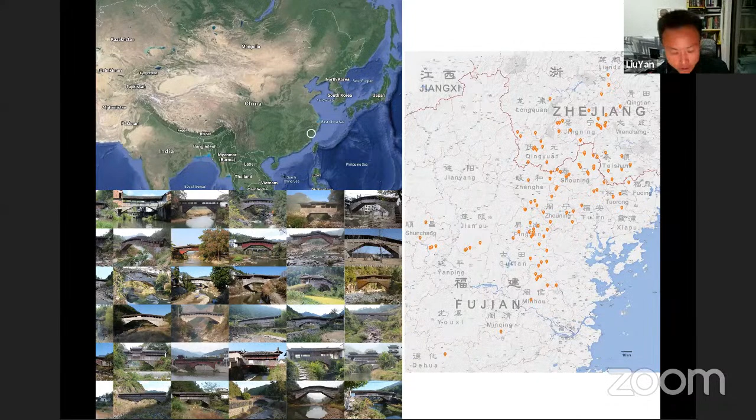In Southeast China, more specifically in the mountains between Zhejiang and Fujian provinces, a group of circa 100 historical woven arch bridges have been preserved until today. They are featured by the woven arch and the deck structure. The craftsmanship of building such bridges in Southeast China has been enlisted as UNESCO intangible cultural heritage.

This kind of structure is classified today under a larger structure type, the so-called reciprocal frame structure in the modern sense. It is a somewhat popular structure type in modern design. Many architects and architectural institutes have engaged in developing design methods for this type of structure. An early pioneer was the Japanese architect Kazuhiro Ishii in the 1990s. Based on the design work of Ishii, Professor Olga Popovic Larsen established the term in the academic field with her book, Reciprocal Frame Architecture.

Professor Vito Bertin from the Chinese University of Hong Kong discussed composition principles of this structure type and made it known to many architectural schools in mainland China via experimental workshops. Another important research group is Professor Annette Spiro's team from ETH Zurich. They developed a digital design system for this rather complicated structure, published in Dr. Udo Thönnissen's book, Reciprocal Frameworks: Tradition and Innovation.

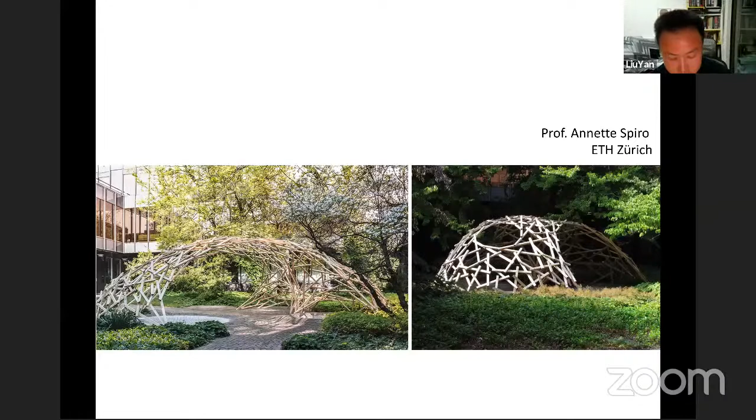Even the Pritzker Prize winner Wang Shu has been famous for his construction experiments with the woven arch and reciprocal frame structure. And today, many architectural schools have taken this structural form into their training system, including Nanjing University, where I took part in the teaching. So if anybody wishes to get some inspiration on design from the historical structure, the above-mentioned books and scholars are good references.

But modern utilization was never my aim. As a historian, what we care about is the operating principle of the historical society and the historical context, which is, in most cases, fundamentally different from our time. In other words, we look back to the past, not towards the future. So when I was invited by Professor Yuan to this symposium, I was very grateful for this trust and encouragement, but I really have great angst to join such a topic facing the future.

So finally, I decided my topic of the talk. Why do we study woven arch bridges? It's actually the question to myself. Why do I study the woven arch bridge, from the viewpoint of an architectural historian? So I'd like to share some of my personal understanding and answers to this question from at least one aspect, from a higher level. So how did I engage myself in the study of the woven arch bridge?

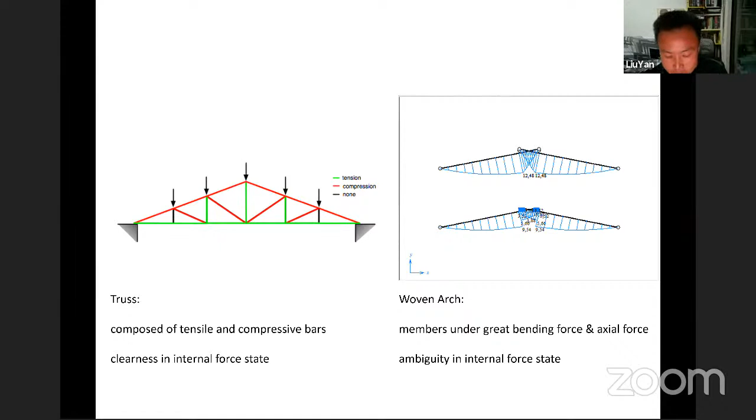Related to the interior force, the structural feature of the woven arch is rather complicated to a mind trained with modern sense. Clearness in force state is one of the design rules in modern engineering. A truss is the best representative of this. The two-force members in the truss not only explore the best loading capability, but more importantly, the clearness in structural logic enables comprehensive structural analysis. In this way, the truss is almost a symbol of structural mechanics. And the truss theory developed in the 19th century was one of the foundation stones of structural science since early modern times, and embodied some of the greatest building achievements of the time in human history.

The woven arch structure, on the contrary, is a representative of structural ambiguity. Firstly, its reciprocal feature means that all the members are tangled with each other. A little change in one member will result in an interchange in the entire system and onto itself accordingly. This makes great difficulty in analysis and calculation. And the structural form is a combination of many features contrary to our common knowledge of common structural forms. For example, it works as an arch, but bears great bending force inside. Normally there shouldn't be bending force inside an arch.

And the arch needs thrust from abutments to keep it stable. But a woven arch does not rely on it. And in extreme examples like the chopstick game, the thrust will cause collapse of the woven arch. Its structural stability actually relies on the load upon it. The greater the load, the more stable the structure, until it reaches the load-bearing limit of the structure. Relatedly, the reciprocal mechanism means that every member is related to the entire system, and the failure of one member will result in the collapse of the entire system. This is the exact opposite of the structural design principle in which safety plays a crucial role.

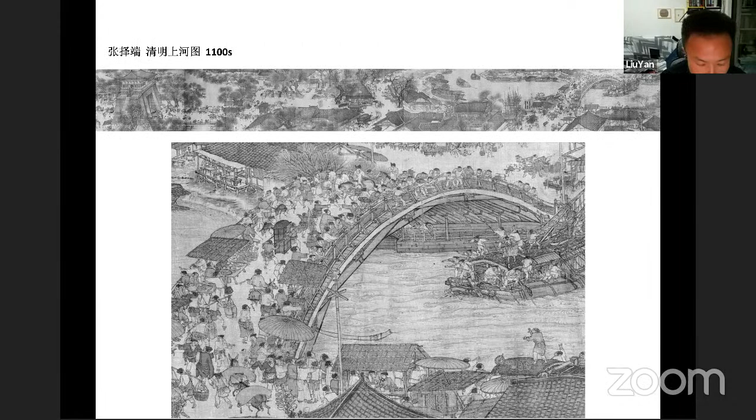In Renaissance Italy, in Da Vinci's design. In Qingming Shanghe Tu, in the northern China plain in the Song dynasty, 12th century. In the 19th century in Japan, in the US, in Norway, in Germany, in Southwest China, Northwest China, and Southeast China. So most of these examples appeared singularly in their own region and culture, believed by the locals to be unique or even one of its type in history.

But when we dig out all these examples from all over the world, the isolation of these respective cases reveals meaningful information. There were speculations from both the East and the West, since the structural form is rather unusual, that the historical cases of woven arch bridges, especially the most famous Da Vinci design and the Chinese examples, were related by cultural influence and/or technique spread.

However, according to my in-depth case studies, there are no direct connections between these cases. Just the opposite, several of them, especially the Da Vinci design and the Chinese cases, have almost solid evidence proving their own local technical origins. Let's explain it very briefly. So, Da Vinci's design.

Da Vinci's story starts from his own cultural root, from Julius Caesar in Roman times. Julius Caesar described a rather peculiar bridge design in his own book, the Gallic War, with detailed technical descriptions. He mentioned a bridge with which he was able to lead his army across the Rhine. And in his technical description, he mentioned some special constructions which inspired many Renaissance Italian architects to study and reconstruct, including Alberti, Palladio and Da Vinci.

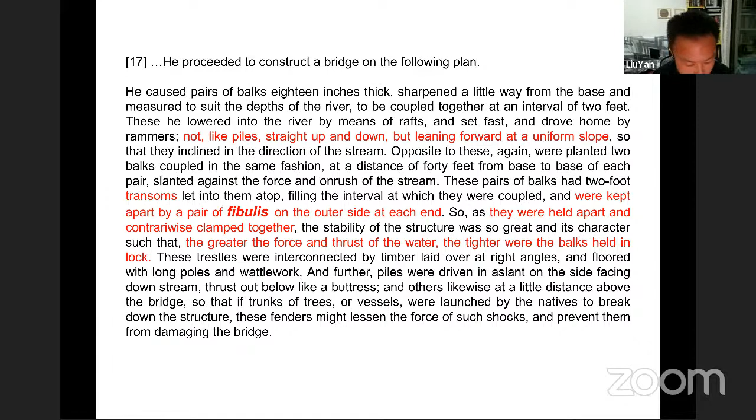It was at a time when Italy was going through endless wars with its neighbors, and both Palladio and Da Vinci aimed to study the military technique of their Roman ancestors to help their soldiers on the battlefield. Both of them got the same inspiration from Caesar on a special wooden joint interlocking each other to enhance the stability of the joint.

Da Vinci developed this idea into the woven arch bridge, and he named it articulately: to weave a bridge. From this idea to weave an arch, he went further to the idea to weave a vault, thus inspiring the modern reciprocal frame structure we mentioned at the very beginning. Weave or textile is Da Vinci's archetype of design, and Caesar's bridge construction is his inspiration.

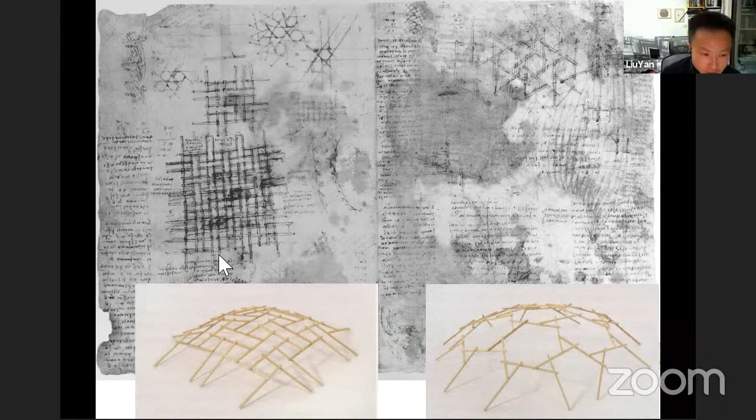Other examples follow some other roads. The Norwegian examples take the local three-sided arch as an archetype, developing the woven arch by enhancing the joint of the three-sided arch. In some other cases, including the Japanese examples and the two types of bridges in Southwest China and Northwest China, the cantilever bridge plays the role of archetype for the development of the woven arch structure.

But for the famous Qingming Shanghe Tu, it's another story. Here, outside the capital city Bianliang at the time, the so-called Rainbow Bridge was built to solve the traffic problem over the Grand Canal. The officers and craftsmen faced the problem of building such a flying bridge without blocking the canal and the ship traffic. The challenge was more about the construction rather than the structural form.

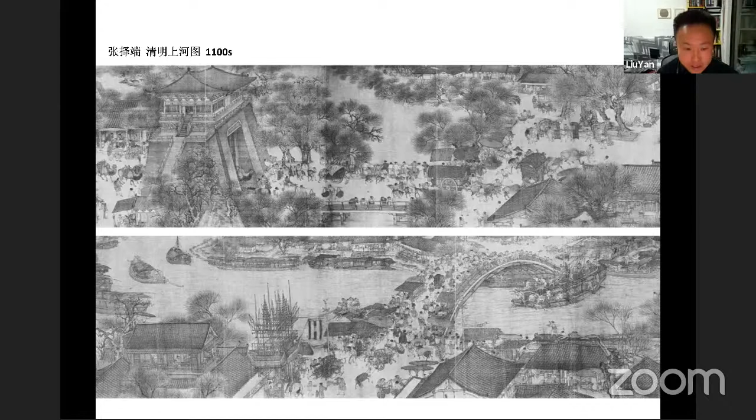Their structure is so similar to the chopstick games that we have reason to believe the game itself might have played the role of the archetype of the design directly. There are some other cases that might be inspired by a similar playful game, including the Japanese examples of different times and places, and the German example.

However, the most splendid examples are the group in the mountains of Southeast China. If all the others are either small-scale items or short-lived experiments, the woven arch bridges in Southeast China are real construction projects to meet the basic living requirements of the local society, to fly over cliffs and deep water, forming a craftsman tradition for over 4 centuries.

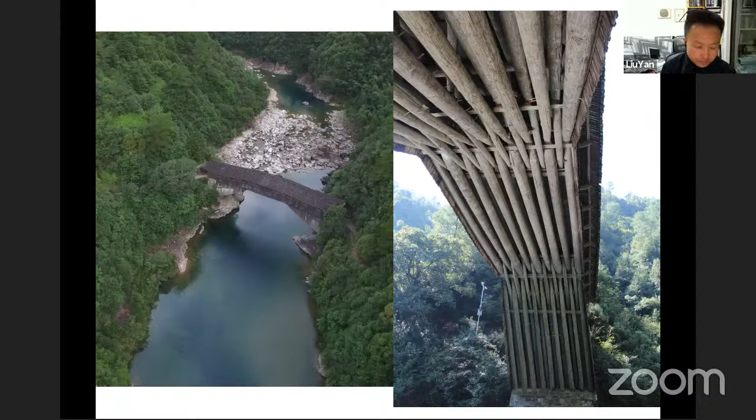At the least developed mountain area, carpenters have figured out a set of design methods using rather primitive tools, drawings, and calculation methods, building grand constructions over the most dangerous sites with the simplest scaffolding system. They had to develop an entire system of technique, from the selection of joints to the cooperation of carpenters with somewhat acrobatic practices.

Despite the strong similarity, they do not have necessary relations between them. The idea of woven arch mechanics, namely to weave an arch-shaped structure with straight timber members to achieve a certain span, could originate independently at any time, any place, as a coincidence in similarity of form, with no necessity of being influenced by each other.

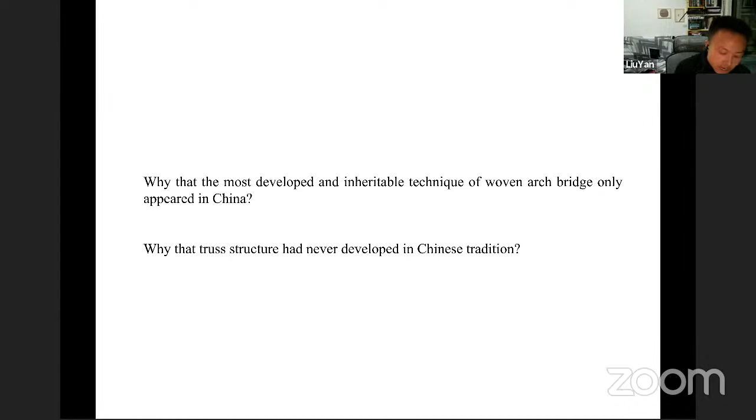It is understandable in European cultures, where truss has a long root in their building history, combined with the fact that truss is a much more effective structural form in span capability and construction convenience. There was no urgent need for people to explore the possibility of woven arch structures, even when they had come up with the structural idea. On the contrary, in China, where truss was never a structural option at hand, facing the challenge of span, when the idea of woven arch came into being, it was more likely to take root in the building culture.

Therefore, my question of woven arch versus truss could be understood as a sub-question of the famous Needham question. He asked, why did modern science take its meteoric rise in the West at the time of Galileo, and why had it not developed in Chinese civilization? So seen from this aspect, the comparison between the woven arch and the truss is actually a comparison between Eastern and Western building cultures.

We mentioned above, rather briefly, that the woven arch, in some aspects including mechanical features and structural logic, is exactly opposite to the truss structure. Their differences exist in mechanics and construction, but also as a representative of their cultures.

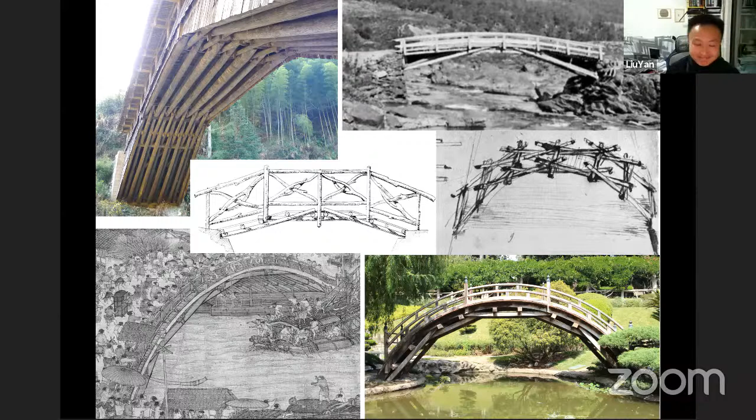Fantastic lecture. I think it gave us a profound address of this kind of timber structure. Cross timber structure goes into not only the history, but also different regions around the world. I think we can make further discussion afterwards. Let me think about the questions.

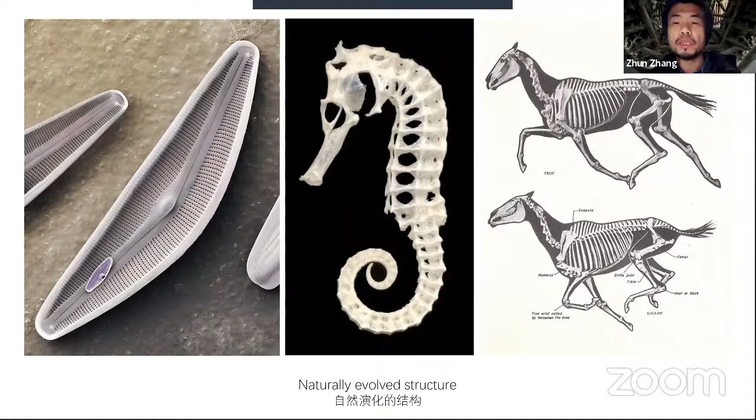So in this view, anything is structured, or structure can be a way of looking at this world. I think this attitude can affect our structure design.

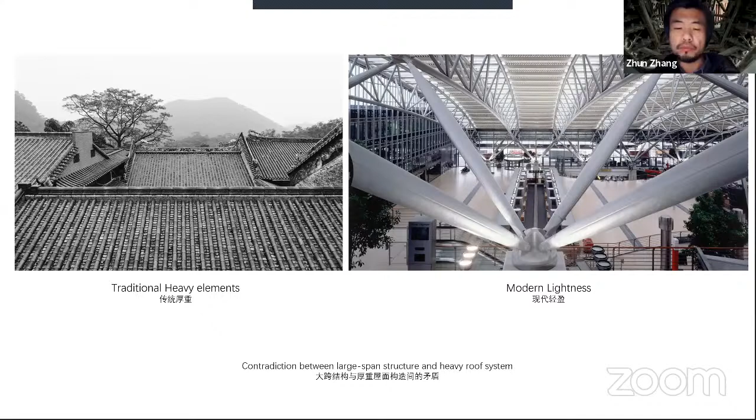So we considered the suspension roof. Three projects had certain reference value for us. The Portugal National Pavilion in Expo 1998 has a real concrete roof - it's very thin, but heavy enough to resist the wind. And Expo Hall 8/9 is a multi-span suspension roof, with roof spans of equal length.

And the Yoyogi National Stadium has an irregular overhanging steel roof. It's heavy enough too, and reaches suspension by flexible cables. What we needed to do is develop their ideas, and the most important thing was to use the real tile as the wind-resisting counterweight.

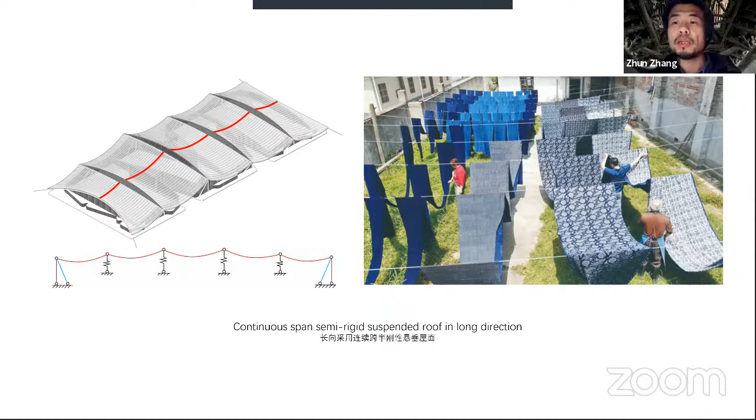Our project has 5 different spans in the long direction, and the heights of the ridges are also different. This roof is like clothes hanging on the ropes. We fix both ends by oblique columns and ground anchor cables. The middle supports are elastic, so this is a semi-rigid suspension roof. In this picture, it shows the oblique columns and anchors - the columns are hidden in the curtain wall, and you can see the heights of the ridges are different.

At the ridge, we use a beam string to support the suspension roof on both sides. It is necessary to carefully adjust the span and the sag of the suspension beams. This can avoid torsion on the beam string caused by unbalanced force, which comes from the suspension beams. On the other hand, reducing the span of the beam strings is also an effective measure to optimize.

Now the main structure system is finished. The right part is the beam string and the A-shape support of them. In the A-shape is the equipment space, and the blue one is the continuous suspension beam. The suspension beam is highly efficient and economical, so the 200 millimeter H-shaped section can span 48 meters.

In the process of improving this system, we found that the mechanical performance of the arc beam is very close to that of the catenary beam. So we try to unify all suspension beams into the same curvature arc. This can speed up the construction.

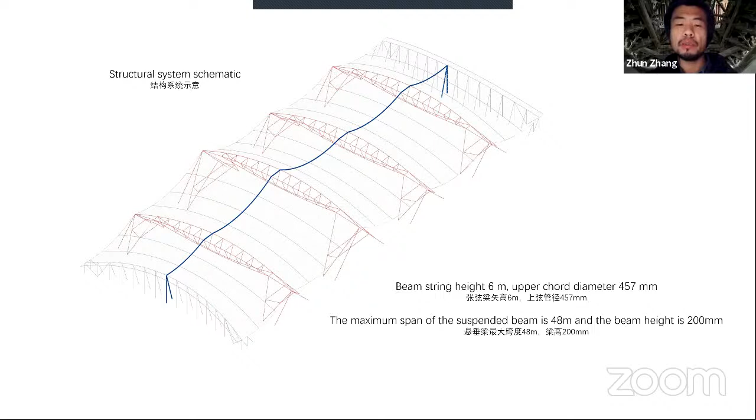After comparison, we found that although the original system has a large span, it has similar material cost, is easier to build, and has better space quality. And at that time, the foundation was preparing to build, so we kept the original system, but we didn't want to passively respond to the space change.

Although the tile's weight is enough to resist the wind, we added anti-wind cable at the location of space division. This cable is also the skeleton of the inner curtain wall.

We started this design in March 2018, and you can see the A-shaped supports had been installed by May, and all suspension beams followed.

It started to install beam string and oblique columns. In the left picture is the resist cable of the A-shaped supports.

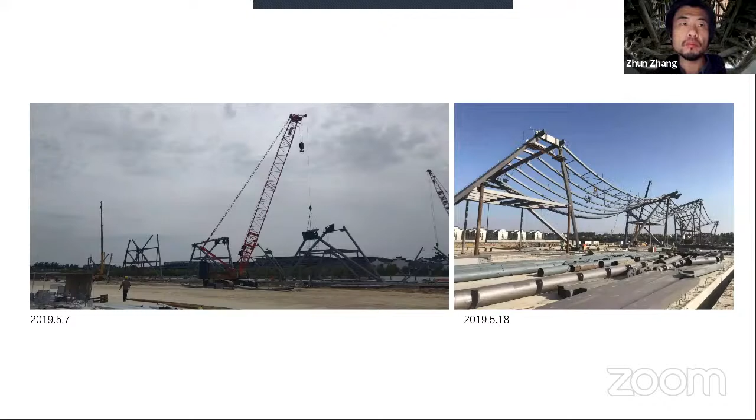Suspension beam almost finished in June. On the left, the worker installed the link members, and on the right, they are laying roof panel and insulation.

The distance between suspension beams is 2 meters. It's just the economy span of the roof panel, so the purlins are no longer required.

On the left, the beam string is finished and the suspension beam lays on them just like a silk scarf. On the right, the curtain wall started to install in July.

For fast building, the tiles were pre-installed in the factory, as shown on the left, and on the right is the internal curtain wall. You can see the aluminum panel fixed on the wind resist cable.

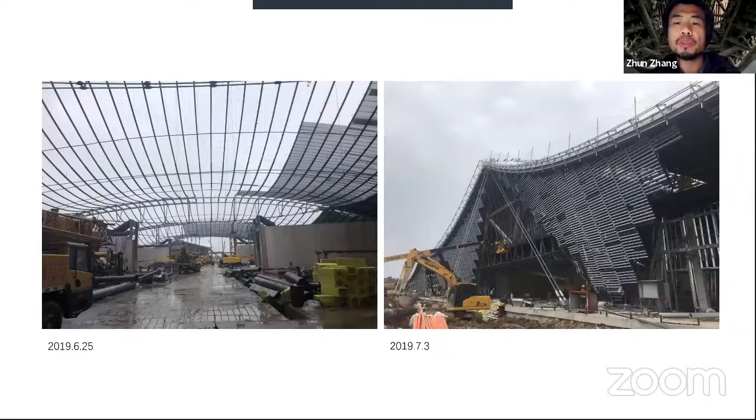In this project, the beam string is an important structure to show, and it's also a skylight. You can see the suspension beams and the wind resist cable directly, but they seem like decoration. In fact, they are also main structure. The A-shaped supports indirectly show this to us.

Through the reasonable design of the structure, the tiles changed from negative to positive for a large span roof, and the detail of the design evolved with external conditions.

The next project to share is a timber roof. It's located in Shanghai. There are 2 roofs covering the triangle courtyard. Because they use the same structure system, I'll talk about the bigger one. It's about 40 by 60 meters, and it's independent of the houses on both sides.

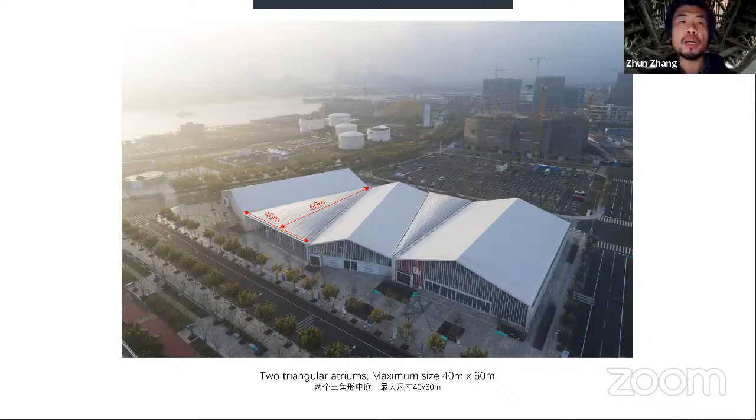The roof is an irregular shallow shell supported on 20 columns. Like the project shared before, this one also needed to be built fast, about 4 to 5 months given to us. The good news to me is the roof can be covered by a polycarbonate panel that is lightweight, and the courtyard doesn't need to close, so the horizontal wind load is small.

For shell structure, form finding is necessary if we treat the columns as the support condition. The shell form will be like the left. The other option is form finding with the triangle edges as the support, like the right. Although the thrust of the left shell is smaller, the curvature of the right is relatively constant and easier to build, so we chose it.

The rise of this shell is about 3 meters. Compared to a normal shell, it's shallow. The shallow shell needs to resist axial pressure and bending moment, especially for this specially shaped timber shell. After its creep, the additional bending moment will become obvious.

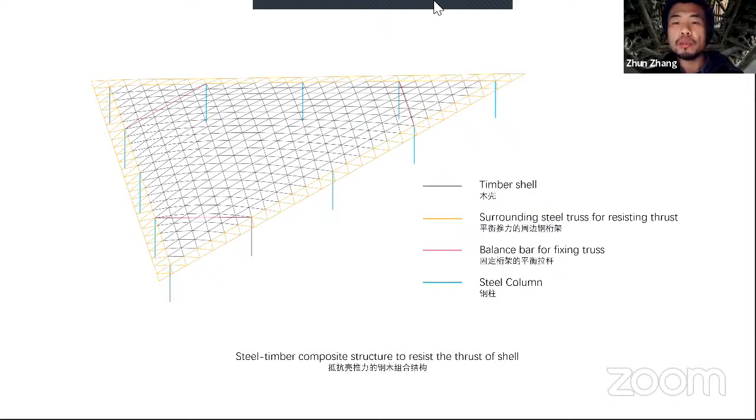It's an ambiguous expression of this structure. The force flow is not directly shown off. That's what we want. In this picture, you can see all steel parts, the columns and the edge truss.

Next is how to detail the timber shell. As we know, the force flows through the shortest path. The arrangement on the left makes it easier to transfer to the columns. But you can see from the entrance perspective, there are too many components. Considering the effect, we chose the scheme on the right.

In this system, the force path becomes longer. So we wanted to use full-length timber members, which can have better stiffness. But the time and the cost of curved timbers can't be accepted. We need another way out. So how to build a large span roof with short straight members? We referenced the lamella roof.

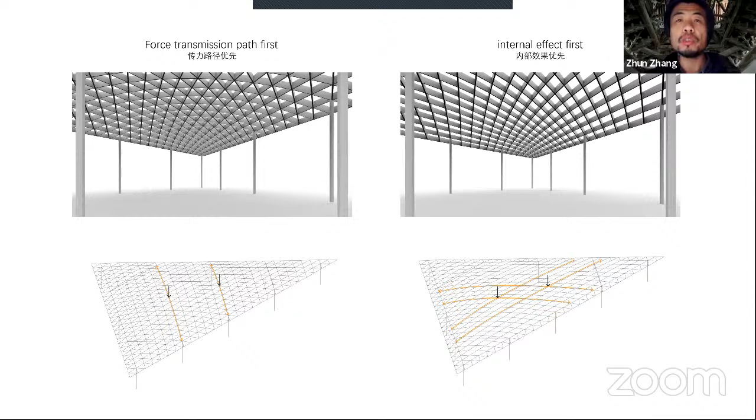But in our project, it's a shallow shell. The joint needs better stiffness. So we must improve this original design. The goal of the improvement is to control the amount of timber, allow better adjustment for installation on site, and increase the bending stiffness of the joint.

At the joint position, the timber members in one direction run through. In the other direction, the bending moment is transmitted by two steel screws and connectors. Two 50mm timbers grip the steel connector and are connected by self-tapping nails. After adjusting on site, the nails are driven in. By using this joint, the roof can be built safely and quickly, just like building blocks.

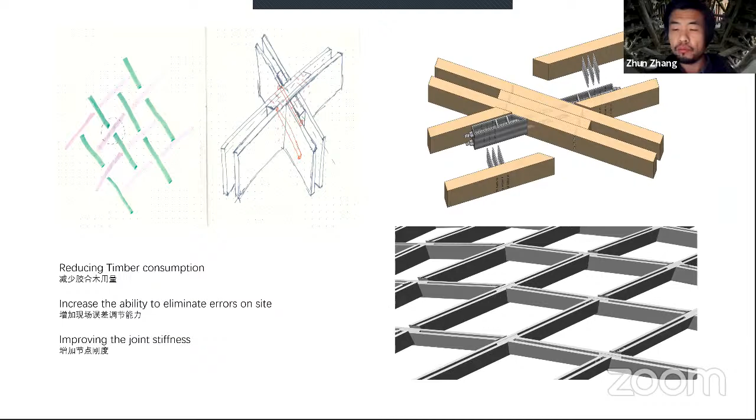The stability of the shell and the connection between the shell and the truss are critical. So in the final design, the related components were reinforced. In this way, the structure was completed on time, and the effect is good.

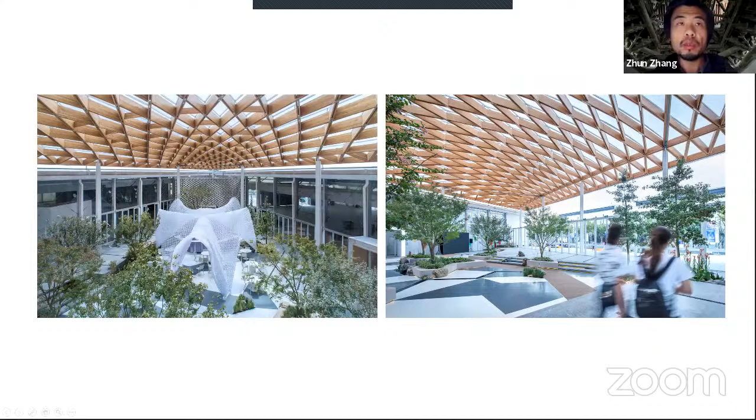In these two projects, structure design not only pays attention to stress, construction, and cost, but also many indirect design clues. This connection of clues reminded me of a Chinese classic: harmony with differences. This sentence comes from Confucius. I think our design faced the same thing. A design concept is important at the beginning, but there are so many changes for different reasons we need to face. Of course, keeping the original concept is important, but the change itself makes the design concept different.

If we look at the world in a structured way, everything can be the clues of the structure. I think that's very important to structure design.

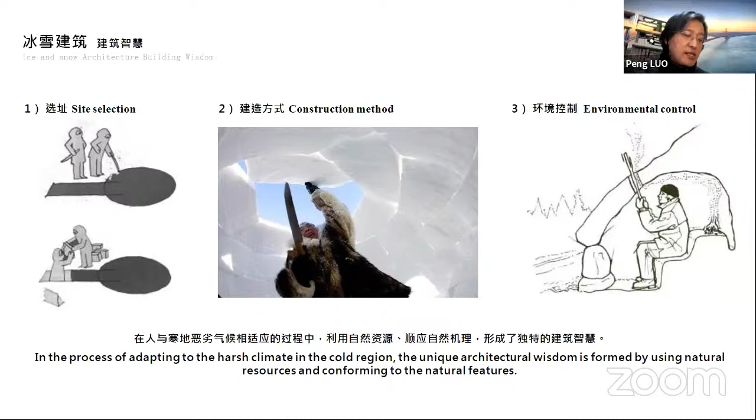Under the action of the spatial environment, a unique natural landscape has been formed. The material, shape, color, and texture, by adapting to the natural environment, form the unique beauty of the cold region. In the process of construction in the cold region, human beings have formed unique architectural wisdom. Ice and snow architecture is a typical example.

For example, the igloo. The Inuit who live in the Arctic were the first to use ice and snow materials to build temporary houses. This kind of snow dome is named igloo. In winter, the inner room is up to 0 degrees.

This is Kamakura in Japan. Kamakura was also built by digging the snow out of a natural snow pile to form usable space. It's usually small in size and used for food storage and wine making. Later, it became a space for traditional Japanese festivals.

The world's first ice hotel was built in Sweden in 1990. After that, similar ice and snow hotels, churches, bars, and other ice and snow buildings have been built in Canada, Finland, Norway, Switzerland, and other places.

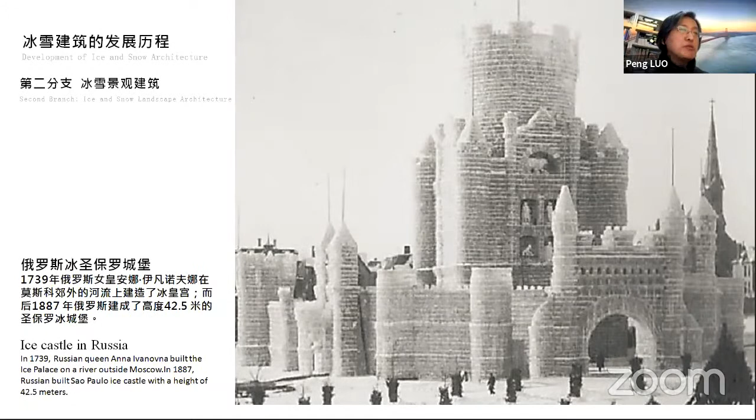Another branch of ice and snow architecture is ice and snow landscape buildings. In Harbin, my hometown, Harbin Ice and Snow World has been built every winter since 1999. At present, it has become the largest outdoor ice and snow park in the world. The highest building reaches 60 meters.

Since 2016, the international innovative design and construction activities of ice and snow architecture have been held in Harbin every winter. We work with many well-known institutions. They include IASS Group 21, Union of Arctic Universities, TUE, Cambridge University, Ghent University, Leuven University, Kent State University from the US, University of Lapland, Tsinghua University, and so on.

Through the cooperation of architecture and structure, we explore the innovation of ice and snow architecture, structure, and construction technology. These projects were made not only by our team, but also by teams from the universities.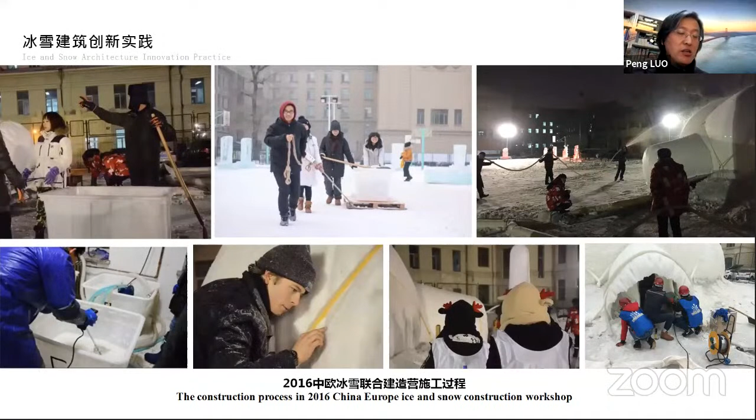The workshop is part of the Ice and Snow Festival of HIT. For the students, the activity is not only a process of practice and learning, but also a happy festival. This is a picture of removing the mold from the ice shell. This is the picture when the project is finished.

Combined with the project, we tested the structural performance, thickness change, deformation, sublimation, internal environment of the ice shell, and the influence of solar radiation. These are the results of the test. And the material test was made by the team of Professor Wu Yue of the School of Civil Engineering of HIT.

Based on the above construction practice and tests, from December 2017 to January 2018, the design and construction of a cloud tower was finished by teachers and students from HIT and TUE in Harbin. The height of the ice shell is 30.541 meters, creating a new world record for the height of an ice shell. For the project, we cooperated with Professor Arno Pronk from TUE and Professor Wu Yue from HIT.

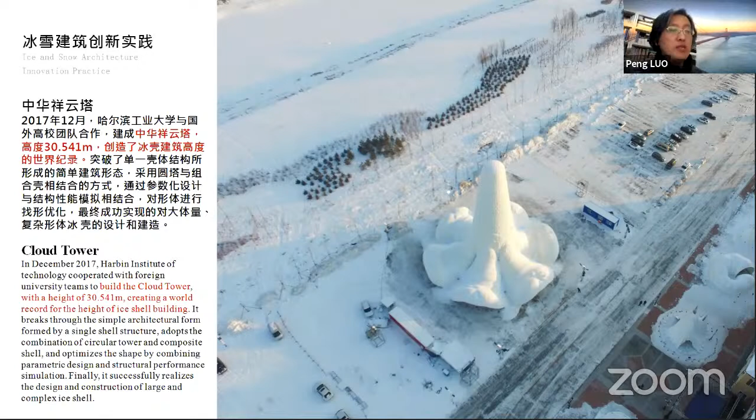This is the construction process of the tower. This is the effect of the external, internal, and night view of the tower.

This is the effect of the ice shell material and the texture. Just like the tower is made by cloud, the texture is not only made by human beings, but also by nature. This is the internal structure and the construction texture of the ice shell.

In December 2018, we designed and built the ice shell bar and hotel in Harbin Ice and Snow World. The total building area is more than 600 square meters. The largest span is 22 meters. The project is the first ice shell building put into practical use in China.

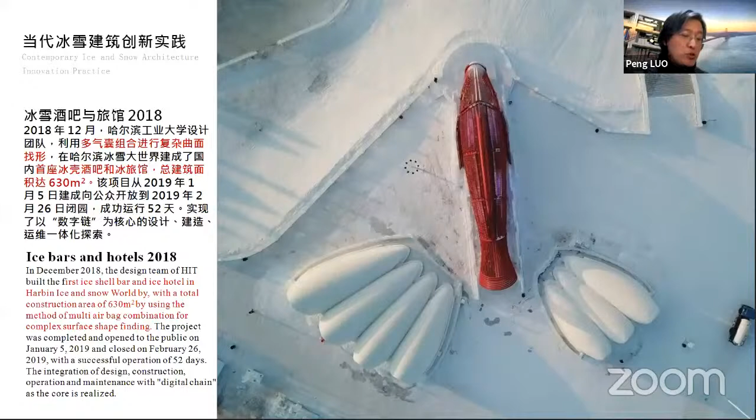During the design, construction, and maintenance of the project, the digital model and computer tools play the role of connecting each stage and realizing the collaborative design of architecture and structure. Because of the time, I only show some pictures of the project. Yeah, this is a picture when the shell was after mold removal and cutting. This is the picture after it finished. The picture from the lake and the indoor effect.

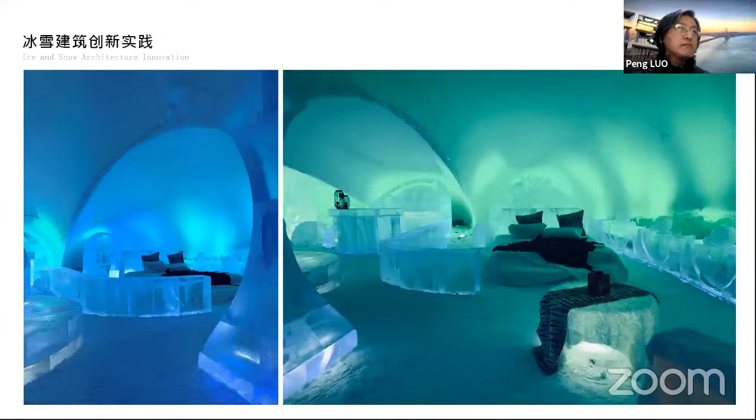In 2019, we used the air bags as the mold to find the form of the ice shell. So form finding and the construction of ice shell by air bags is helpful for mold control and cross construction for different types of work in the process of construction, and is also helpful for the innovation of architectural form. With the project, the combination of design, construction, operation, and maintenance of ice shell based on multi-objective optimization was realized.

The site is the same as last year. There are an ice bar and an ice restaurant on the site. The total building area is about 930 square meters. The building area of the restaurant is about 660 square meters. It's a hot pot restaurant.

The project is based on the material environment and the unique requirements of the architectural art. Comprehensive consideration of the needs of the construction and the user by analyzing the influence factors of design. Four key design elements are summarized. They are structure, function, construction, and art.

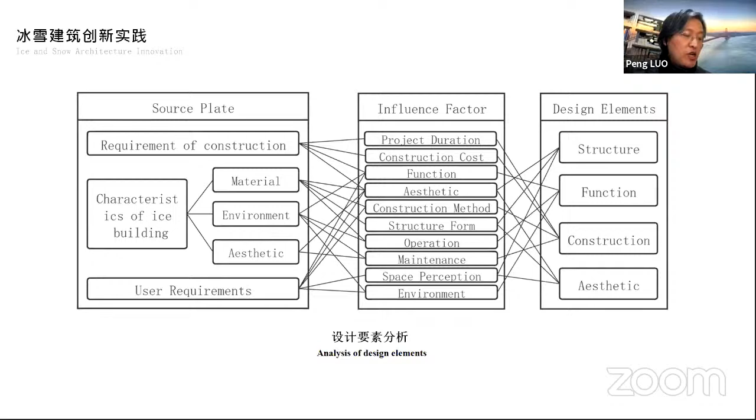The work starts from the design elements based on the digital design logic, especially a spatial digital integrated design system, and then integrates the digital design tools, building the technical route. Based on the site, structure, function, and art, the scheme of the building is formed and the digital model determined. The model is used for the performance simulation and optimization.

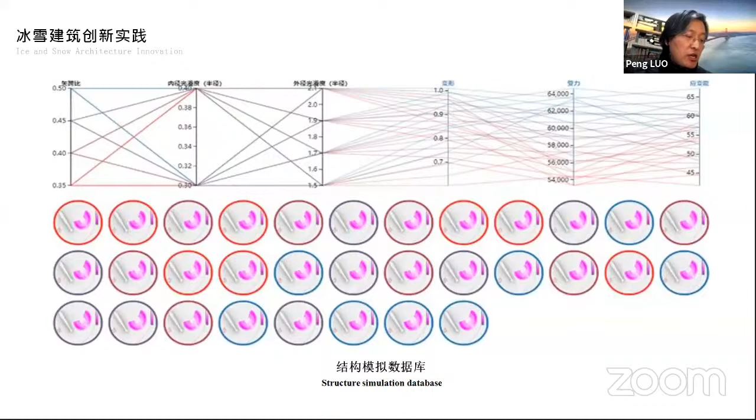Grasshopper based on Rhino is used to build the digital information model. In terms of structure, Karamba 3D is used for structural performance analysis, scheme comparison and optimization. Considering the influence of solar radiation on the ice structure is significant, Ladybug is used for solar radiation analysis to determine building form and orientation.

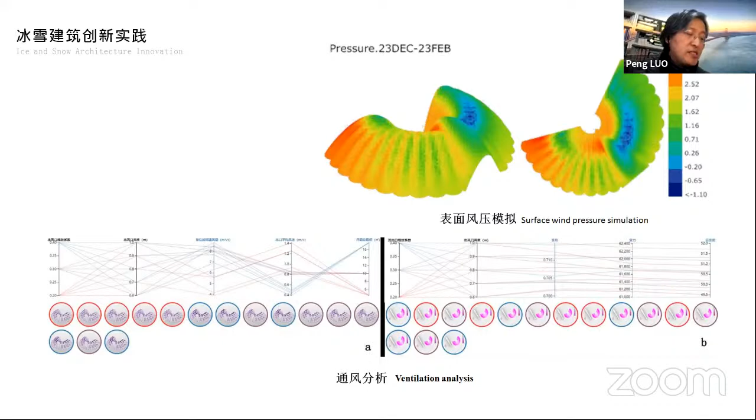In function, the Rhino visual interface is used to control the plan layout, and analysis of outdoor wind environment and indoor ventilation with Butterfly determines the location and the size of the building vents. Therefore, the digital model is used to simulate the structural deformation and the stress, and determine the structural thickness of the ice shell. Export model data, draw architectural drawings, determine the internal design.

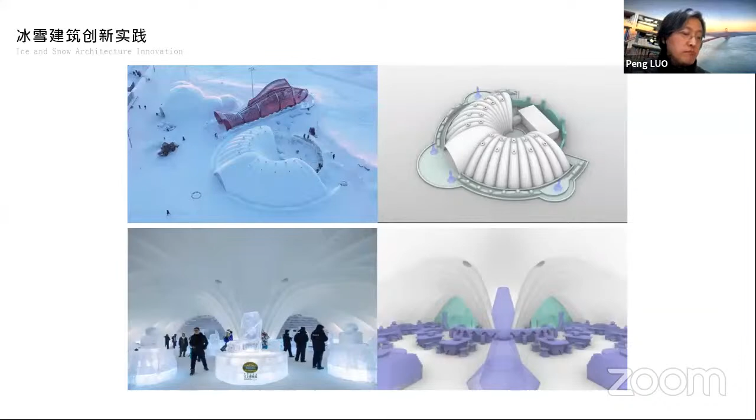The visual effect of Rhino models is used to evaluate the artistic effect of the buildings. In the aspect of construction, the digital model is used to control the processing of the inflatable membrane, set positioning, and air pressure control. And through 3D scanning, the digital model of the construction mold and the ice shell was generated, which is compared with the digital model to determine the safety of the structure.

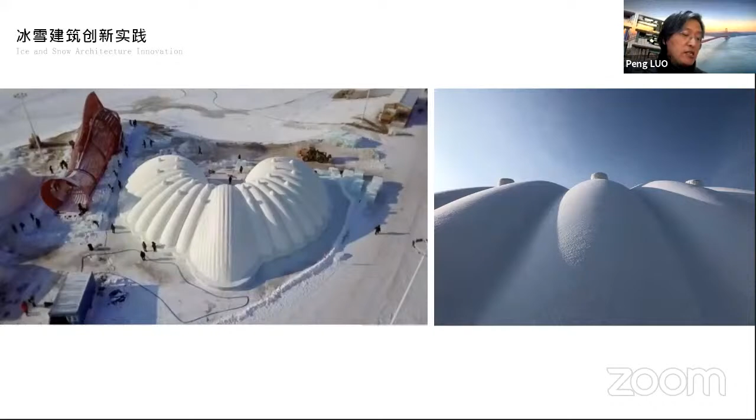The ice shell has good climate adaptability. The internal space environment is stable, which gives good protection for the internal ice structure. When it was removed on March 23, the outdoor temperature reached 10 degrees above zero. The project was reported by Discovery of the UK and CCTV of China.

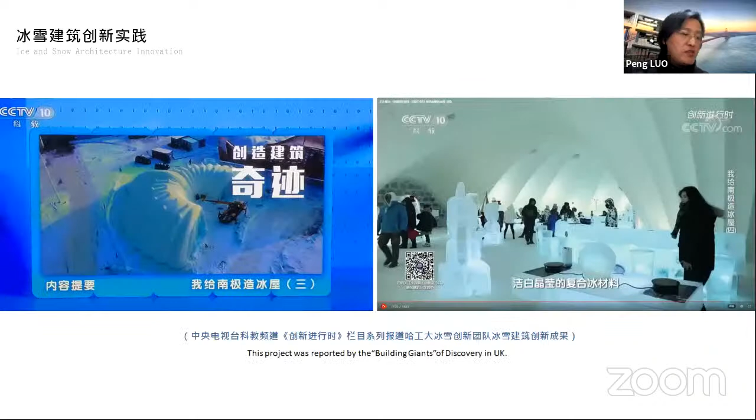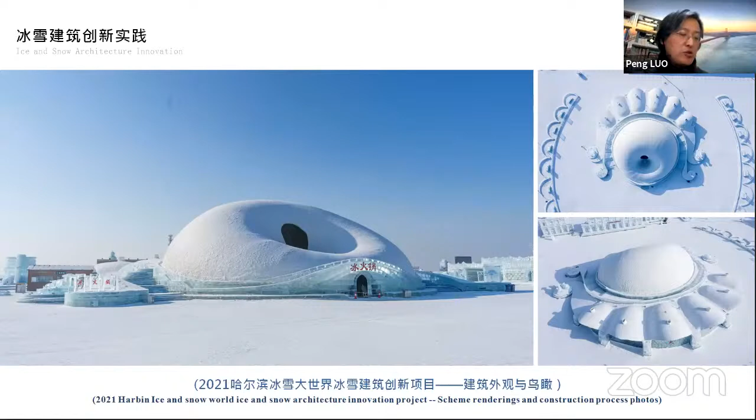The 30-meter ice shell was all located on the ice masonry structure. Six small ice shells with a span of 6 meters are supported on three sides by ice walls.

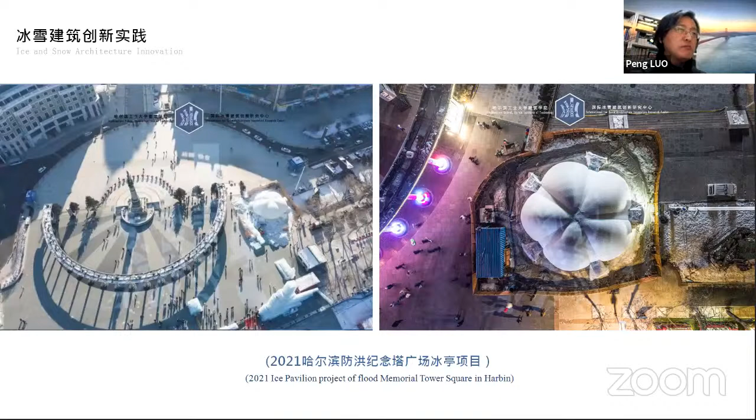In addition, this year we also designed the ice pavilion project on the square by Songhua River. Only 5 points supported the 12-meter ice shell. Through the research, design, and construction practice of ice shell architecture, we have the following opinions.

Ice and snow architecture is a part of nature and a common work of human and nature. Ice and snow architecture design should adhere to design with nature, adapt to the natural environment, apply the principle of nature, create the beauty of nature. The original beauty of structure is an expression of natural beauty in architectural projects.

Digital design methods and tools are important to support a better understanding of nature, better conforming to nature, and better cooperating with nature. Find the wisdom of the cold region, establish smart design, construction, operation, and maintenance. An integrating system based on digital twin is the future of ice and snow architecture.

Of course, there are still many questions to be answered in ice and snow architecture. We look forward to communicating and cooperating with you, and welcome to Harbin next winter. Thank you very much.

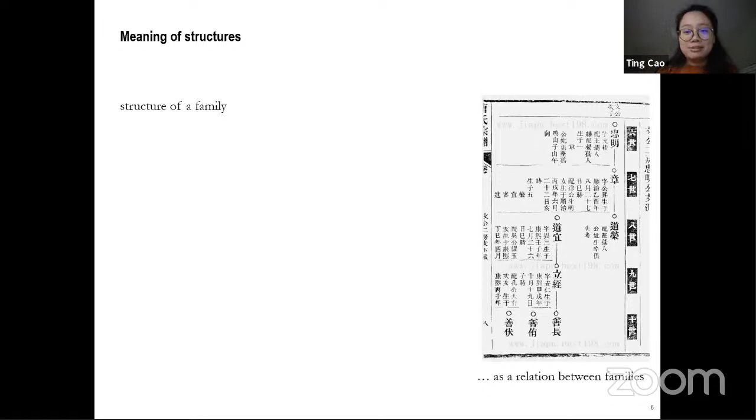And also, if we're talking about the structure of a family, actually we are talking about the relation between different family members. So generally speaking, structure is an arrangement and organization of interrelated elements in a material object or in a system. So in this sense, I would say structure actually is a certain abstract relationship between different objects.

So if we go back to our research fields, we are generally talking about load-bearing structures. For the load-bearing structure, we normally think of it as a predefined shape or typology, something already existing that you cannot change too much, like beams, columns, trusses, or arches. Something with solid experience. We never think about what could be the abstract relations behind this structure typology, how we can change these relations, and how our design could benefit from this change.

So if we don't consider the structure as a predefined shape, we should find a universal way to describe all the structures. The fundamental meaning of the structure is to transmit loads to the ground. So the transmission of the loads, of the forces in the material, will become force flows. Force flows, we also call the form diagram in graphic statics.

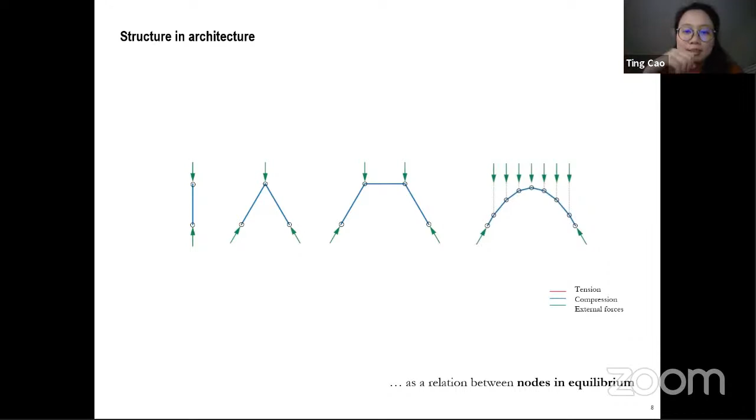By manipulating the nodes in equilibrium, like changing the number of the nodes, the position of the nodes, and the connectivity between the nodes, we could get thousands of variations. Each variation could represent a new equilibrium relationship in structure and a new load path to transmit forces to the ground. So force flow can deform and grow according to the same principle, the principle of equilibrium. Here, we discuss the first layer of meaning of force flow as the equilibrium relation in structure.

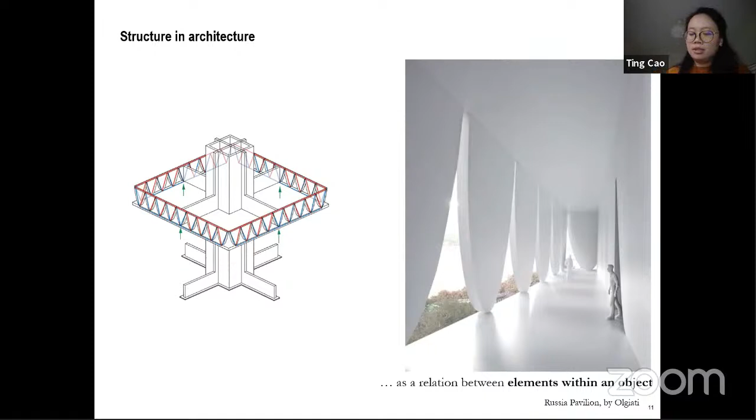So this gives a small conclusion: we shouldn't judge the structure according to appearance, but for the logic lying behind. That's how we could create something new for our design.

The relation represented by the force flow can go beyond one object. In this case, the Horizon Innovative Center designed by Kerez, the equilibrium of the force flows defines the compositional order of all the elements in this spatial system. You may see the variation of the columns differ from one to another, but all these variations come from the same simple equilibrium principle: two inclined columns balance each other through the slab. Starting from this simple equilibrium relation, we can manipulate the points and loads in equilibrium, and get more variation of the columns in space.

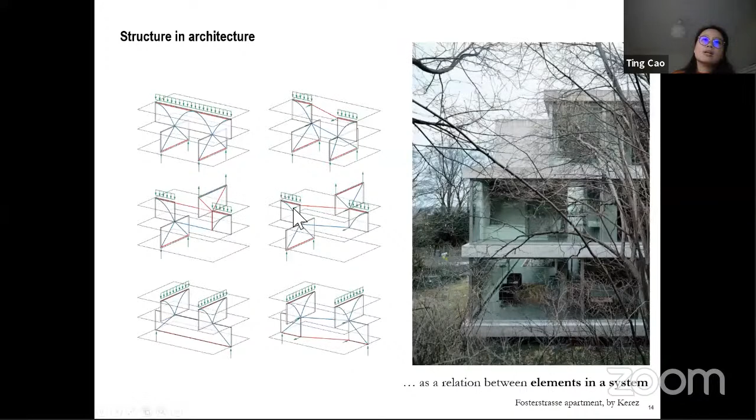Here we talk about different relations in architecture and structure. Some of them are more close to the load-bearing function of the structure, some are more close to the definition of architectural space and appearance. However, I would conclude all of them as an abstract compositional order, because all these relations are discussing elements and relations between elements, no matter if the element is an abstract one or a material object.

Here there would be one diagram that could represent all these relations: that's force flow. Force flow is an abstract and operative diagram. With this diagram, as we described before, we could generate a lot of variations.

Then here comes another question. Since we have a lot of variations, that's a good advantage for us, but how can we decide which one is the best choice for design? We have to think about it from two sides.

From the structural side, we normally judge the shape of the force flow according to the performance of the structure, which would be the most efficient load path to transmit the load to the ground, because the force flow is actually the path to transmit loads to the ground.

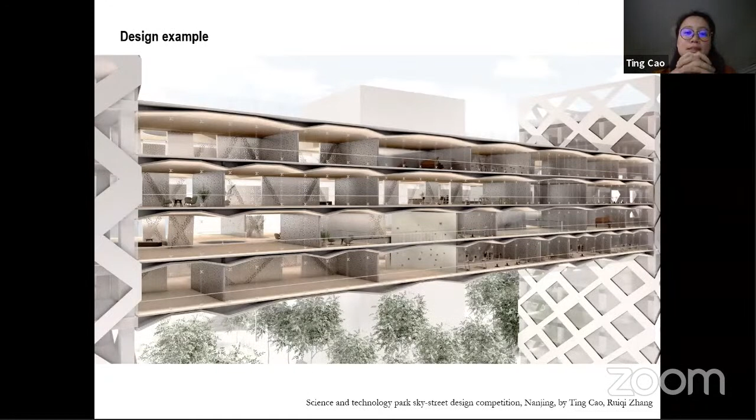In this design, the first question we need to solve is a big span, around 60 meters between these two buildings. So our design first starts from a normal truss-like force flow.

This force flow doesn't suggest the real shape of the structure, but it suggests a relation, an equilibrium relation, and also the compositional order to arrange these walls in space, because this force flow will somehow define the side walls in the center corridor. Here we add more horizontal slab.

In this sense, we could create more equilibrium nodes. By manipulating these nodes, we can get more variations on the force flow. When we change the force flow, we also change the order to place this element.

In our design, we try to create different visual and spatial experience in the corridor of each floor. That's why we started a 3D formation of the force flow, which also leads to the change of the corridor walls in different floors.

Then the next question is: how are we going to define the side walls? The side walls are cantilevered from the central structure. Here we always place the side structure symmetrically on two sides, so the two cantilever parts could balance with each other through the tension or compression in the slab.

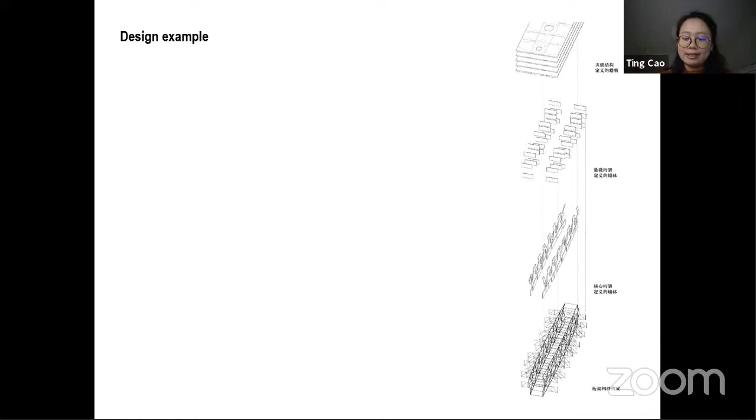This is the way how we can achieve the global equilibrium of the structure. At the end, this is the position of the walls and the slabs, and the guidelines lying behind it. When we look at the building from an architectural point of view, the walls are arranged randomly and irregularly. However, the structural logic lying behind is very simple and regular.

This difference between the structural regularity and the architectural randomness is what we want to achieve according to this project, and this is also, we think, what could make this project interesting.

So this is a test for what I described before: how to make use of force diagram as a compositional order to control the equilibrium relation and the compositional relation in architectural design.

For sure, since the force flow is a graphic, operative, and abstract diagram, made mainly from points and vectors, it's very easy to be digitalized and applied as a digital tool to help us develop design. In our group, someone is already developing tools in this way.

They mainly judge the development of this tool according to performance. But what I want to stress in our presentation is that perception, which is more related to architectural design, is also very important for this design thinking.

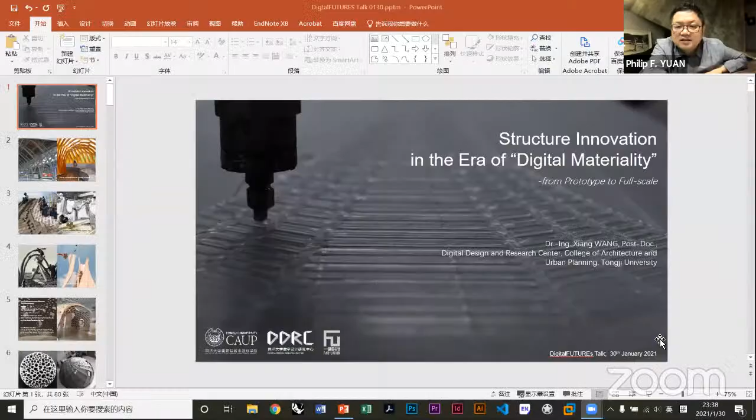So last but not least, we have another speaker today, whose name is Xiang. Xiang is a postdoctoral researcher in Tongji, and great congratulations to him. He just got an assistant professor title in Tongji University.

In the past 2 to 3 years, he actually worked with me, working in my team, and gave a lot of contribution in our research projects. Xiang got his undergraduate degree in Tongji University, and then got his PhD from University of Darmstadt. His research especially focused on structure performance-based design, and after working with me, transferred to robotic fabrication methodology, integrating how to implement structure performance methodology into the robotic fabrication and construction process for the project.

So tonight he will give us a special speech. The topic is structural innovation in the era of digital materiality. So please, Wang Xiang. Okay, thank you, Professor Philip, and hello everyone.

It's a great honor of mine to be here to learn from other guests about their fantastic work, and also to share with you some of my researches. As it has been introduced by Professor Philip, I have joined Professor Philip Yuan's team since 2017 and just finished my postdoc job, and will now work as an assistant professor in the Digital Design and Research Center in the College of Architecture and Urban Planning in Tongji University.

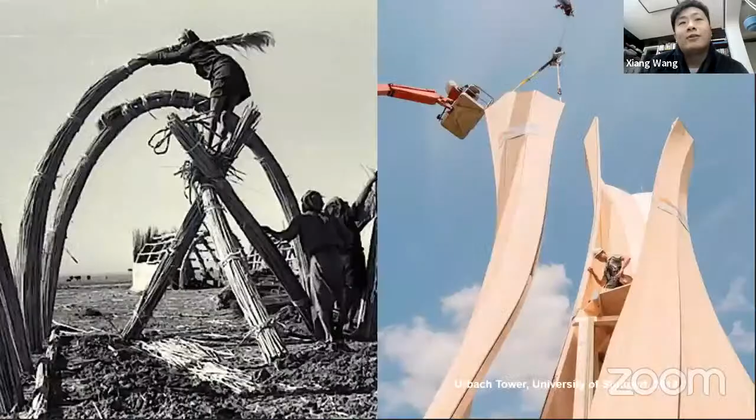If you watched 3 weeks ago, you will know the project from Princeton University, where they used 2 robots to build masonry and brick structures automatically. Also, how we can learn from ancient builders and find the intelligence in their thinking of structures, and then how we can transfer that or use recent advanced computational technique to make some innovations.

So today I want to share with you some of my research and projects, following a time sequence. The first thing is what I have done during my PhD period, where I created and researched a kind of structure special for thin materials.

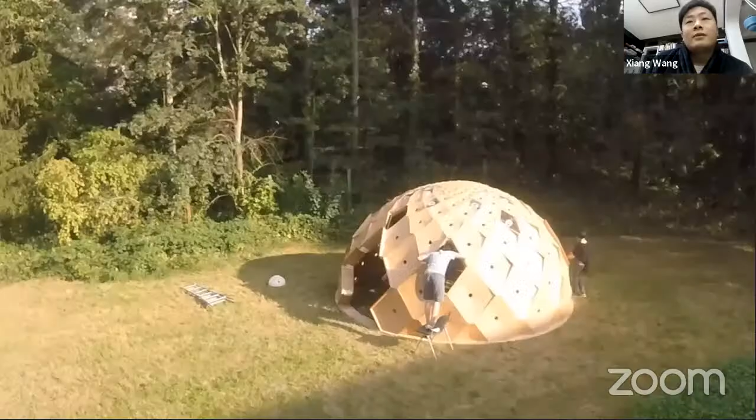The structure is a dome with a diameter of 5 meters, and it is built by 180 cells with the material of 1 millimeter pressed paperboard. So they have several membranes and are hollow inside. And even though the structure is very lightweight, it shows great stability. So you can see a person who is about 60 to 70 kilograms climb up the structure, and it also shows great stability as a full-scale structure.

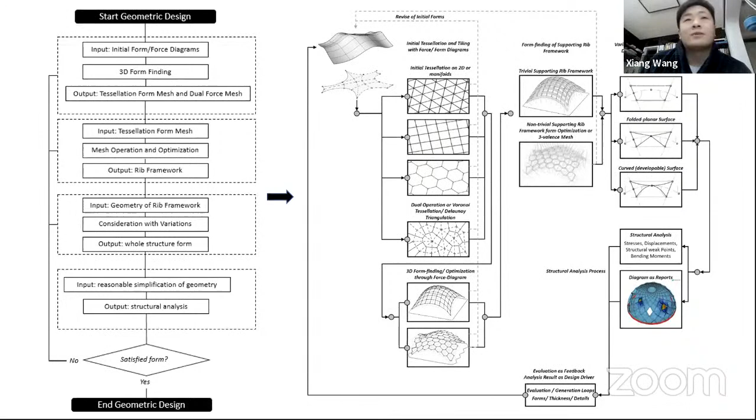But because we are using very thin materials, there is another problem. It's not the global one, but the local one, which is the buckling problem. Like if we press a very thin box, the structure will suddenly have a very large curvature and then collapse. So my research at that time is to set up this kind of system, how we can get this kind of cellular cavity structure. It considered the tessellation, and then the geometry details, mainly with the target to build everything with developable surfaces. And then we need to consider the local behavior of the structure and how we can choose the appropriate forms. We also did some deep research on the materials with some tests to get the material parameters for our analysis. And then for the local problem, because every cell will ideally be under axial compression, we actually have 3 kinds of basic possible selections of the shape of the skins due to the definition of developable surface, which are the conical ones, the folded ones and the planar ones.

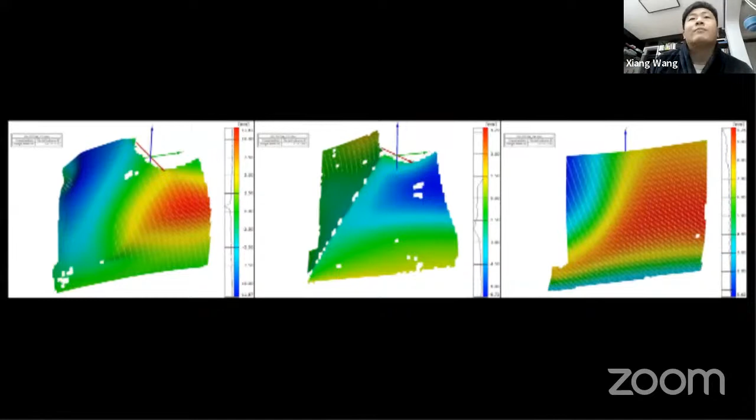Then we have done some buckling tests with the FEM software, and we also did some real physical tests with the DIC technique to see the buckling behavior of the different variations. Like this is when it is under axial compression, we can see how it behaves and how the structure buckles when it comes to the critical load. And after that, I also set up the method for how we can define the geometry and the construction details or sequence of the whole structure. And we tested that many times during my PhD.

And then it comes to how to understand the structural behavior of this kind of system. Our hypothesis is very simple, but actually there is no material along the path where the force flows, because every cell is hollow. So actually, understanding the structure is very complicated. It's a coupled system: one system of these circumferential ribs, and another system of the covering membranes on 2 sides. And then we tested different analyses with models and with different load cases to know how this kind of structure really behaves.

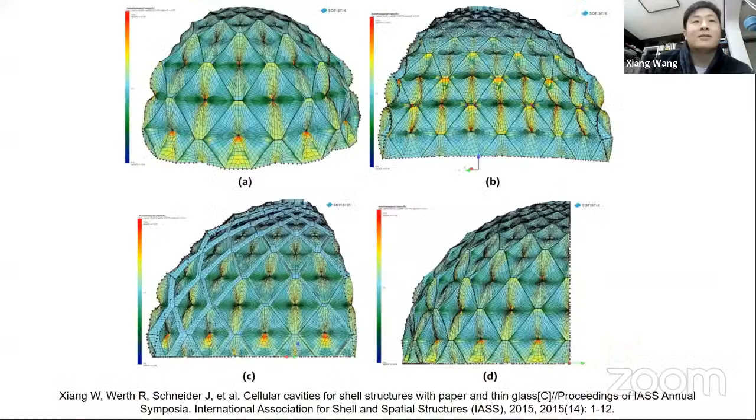But if the whole structure is under a dynamic load case, like the wind load, these supporting ribs will suddenly provide a lot of stiffness for the whole structure. That is how they do their job for the whole structure. And another thing is that the smaller the cell you have and the deeper the cone you design, the better the structure can be.

Very interestingly, we built the shell in 2015 at the IASS symposium in Amsterdam. And after one year, we saw another pavilion built by Innsbruck University in Vienna. They tested our idea from another way. You can see they also used this kind of conical surface in a very deep way. And they used thinner materials, also paper, 0.75 millimeter. In this case, there are no circumferential ribs, only the membranes take the structure.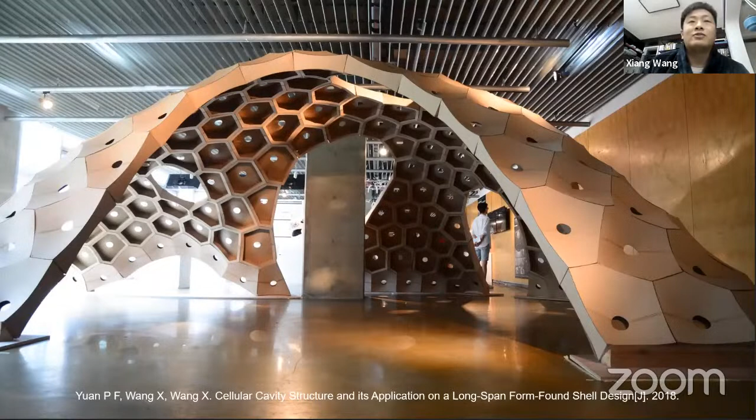And then after my PhD in 2017, I was invited to come back to Tongji to lead a group in DigitalFUTURES 2017. We built a purely free-form structure with also almost 200 cells. This is a pure free-form one, to test whether the whole design process works in this case.

So after that, I want to share with you another series, for another typology of structure, which is bridges. The later work I have done is mostly in collaboration with and under the guidance of Professor Philip Yuan, so it's our team's work. Because I joined the team in 2017, the bridge projects I have collaborated and contributed in are mostly the two bridges in 2018 and 2019.

So this is the 2018 bridge where we were testing a new construction technique of 3D printing. It can be simply called 3D metal printing, but the name is wire arc additive manufacturing. A gun welds the metal layer by layer, like the FDM technique in 3D printing with plastic. We first tested that with some prototype chairs. This is a student's design of a chair, using a combination of linear elements like trusses for a solid shape, and letting it work as a chair.

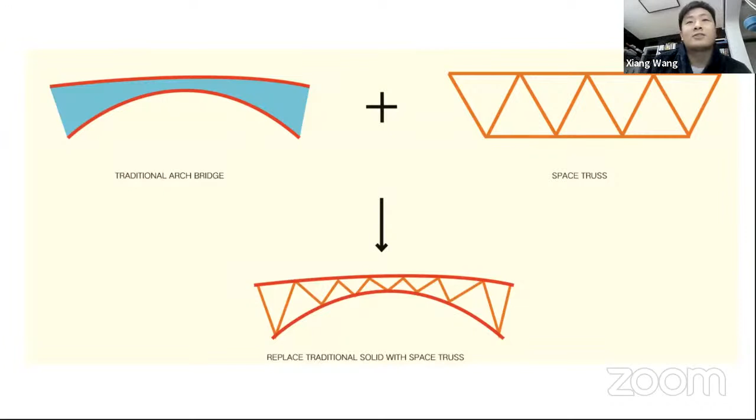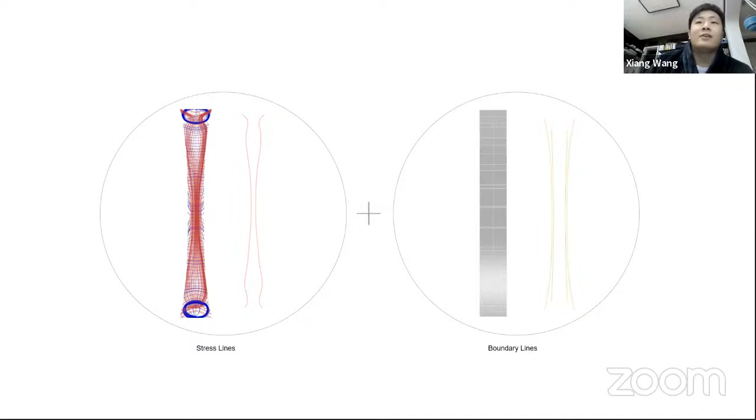And then we wanted to move that into a bridge. Because for a bridge the basic form is very hard to change, it's like an arch system, we wanted to make it a combination of arch and trusses. That is how we got the basic idea. Then came the basic form finding of the shape with two catenary lines. And then we used the 3D topology optimization method to first optimize the whole design domain of the shape. Then we calculated the possible principal stress lines for this optimized domain, and extracted the control lines.

And then finally we used the robot arm to print everything automatically. We cut the structure into 7 parts, and here we have a steel frame to help us control the basic form, and let the robot arm finish everything. So this is what we finally have for the bridge. It's very lightweight, and we had lots of people on it to test whether our idea works.

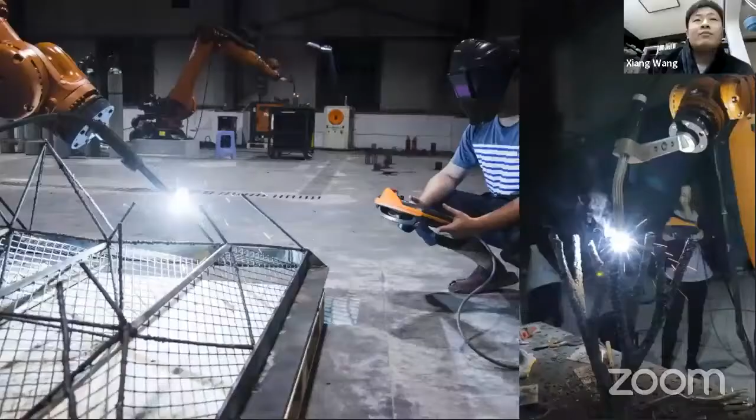And then in 2019, we finished another bridge, which we call multi-materials robotic fabrication, with 3D metal printing and fiber winding. The idea behind this bridge and this form is rethinking the way we chose to define the form for this kind of building technique, because we are using 3D printing, but the form we chose in the last bridge was still a linear form.

So from this aspect, we want to make some new progress, whether the thing can show the concept of 3D printing. So we have tried to print this kind of flower-like or tree-like structures, and we applied the 3D topology optimization method also firstly for the chair design. This is a girl's design for a chair, and then she printed everything and finished the chair by herself to test this workflow and concept.

And then finally, you can see the whole structure for the bridge. We divided that into 2 parts. The purely structure can be a very lightweight skeleton-like structure with 3D metal printing technique. And then the stairs and the sidewalks, they are finished by the robotic winding of the carbon fibers and the glass fibers.

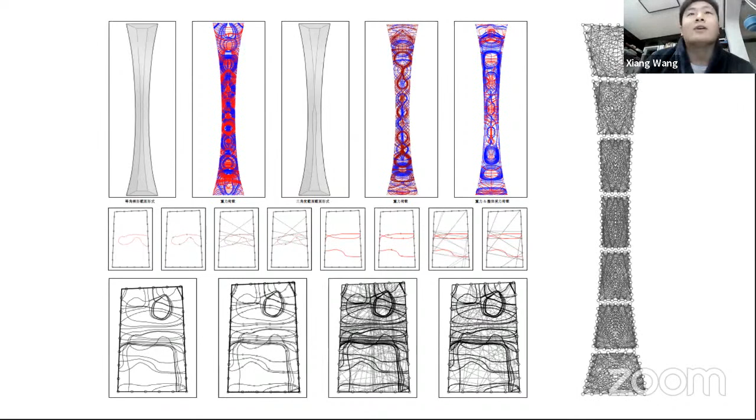And for the glass fiber and carbon fiber things, we also use the idea to think about structure behavior. And we firstly calculated also the principal stress lines of the surfaces under its load case. And then we want to arrange our fibers more along the direction the force flows. And then this is how we generated the winding sequence of the robot path planning. And then this is finally how the robot wind the whole structure. And then this is finally what it looks like.

And also another very lightweight structure, but it's showing our idea and our attitude of how we should design the structure with our building techniques. And this is from the bottom side, you can see the structure. And then from the front side, you can see the sidewalk and the stairs.

And then the last one is also a series, which is about shell structures and its building technique. And rather than the pure form finding techniques, I also care a lot about the efficient building technology for the shell structures. So the idea is like this. So we think the shells are very efficient. We can use very few materials to have a very long span.

But when we consider the fabrication process, you can see especially when the form is very complicated, a lot of materials or the cost will be used in the formwork system and for the fabrication. They are almost wasted after the shell is built. So with this idea, I have worked or helped Professor Philip Yuan in our collaboration with the ETH team by Professor Philippe Block.

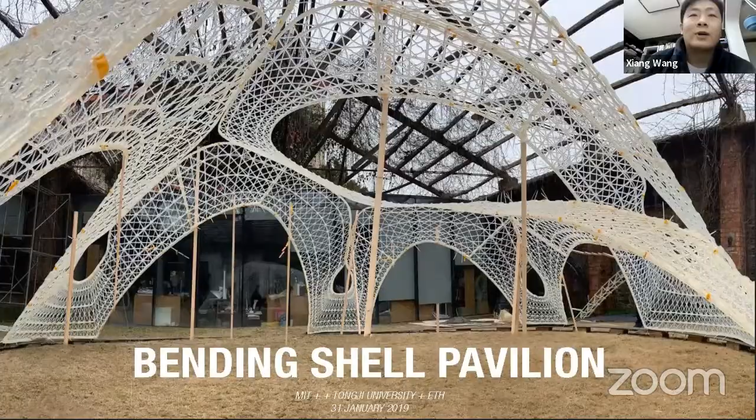So at that time, we have tried to generate a design to fabrication system to deal with this kind of concept. And we also deal with the problem of how to simulate the large deformation in the bending process, and how to define our final shape of the system. And then how to 3D print that and to plan the paths for the robots. And then finally, we can just build the structure or the formwork by simply putting the things on site in the right position and then connecting the different joints, and then the structure will bend itself.

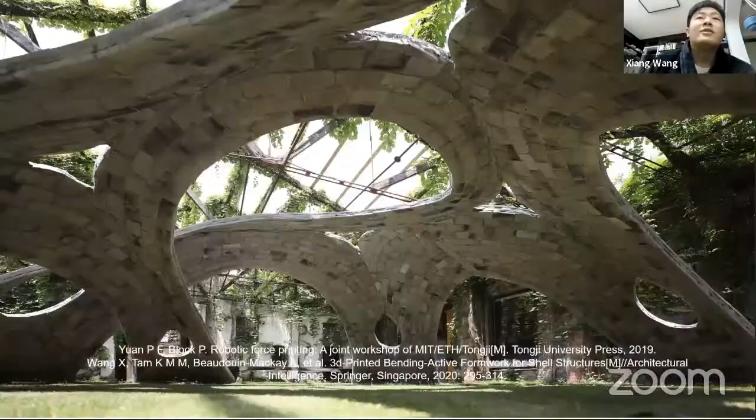And once it is bent, we can put the first layer of bricks on top of that, then when it's hardened, we can put other layers of bricks on top of that, then finally the shell will be built. And with this method, we have built this experimental pavilion as a demonstrator with 3 layers and almost 50 millimeter thickness, and a very large span shell. And we also tested other examples to make this kind of bending active formwork for concrete, for us to pour the concrete and make it stable.

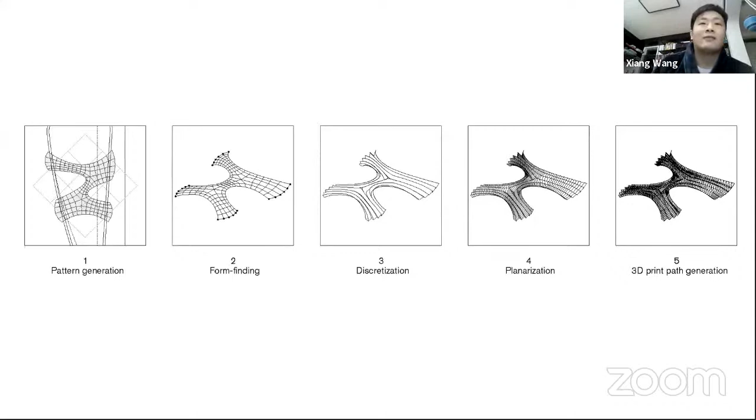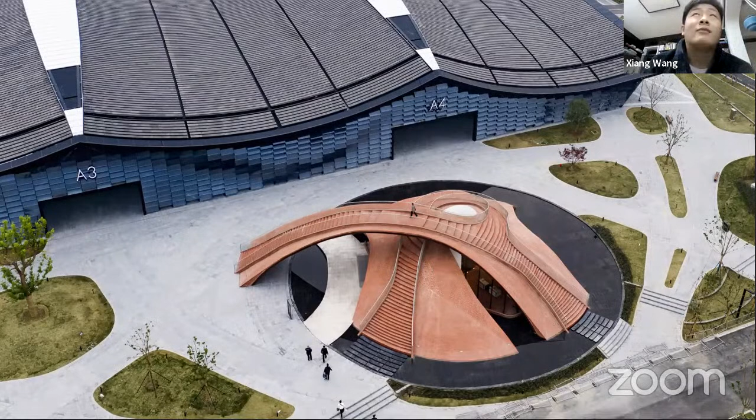At that time, the idea is that maybe we can use a modular system of 3D printed blocks and make it together with the PU as the insulation. So we can make the formwork also work together as part of the architecture itself. Then if we can design it correctly, the whole structure can be divided into, in this case, more than 1,000 of these 3D printed blocks. And for the pattern design, we also made some new changes.

We designed it firstly as a reciprocal structure, but instead of the normal method of reciprocal structures with this rotation method, we have chosen another reference and used a new reciprocal form, called the nexorade, in our structures. There are two advantages. The first is that at a local point where the curvature of the geometry is very high, the eccentricity of the different bricks will be lowered. And the second, our patterns will be better adjusted to the direction the force flows. With this idea, we have built a whole formwork system.

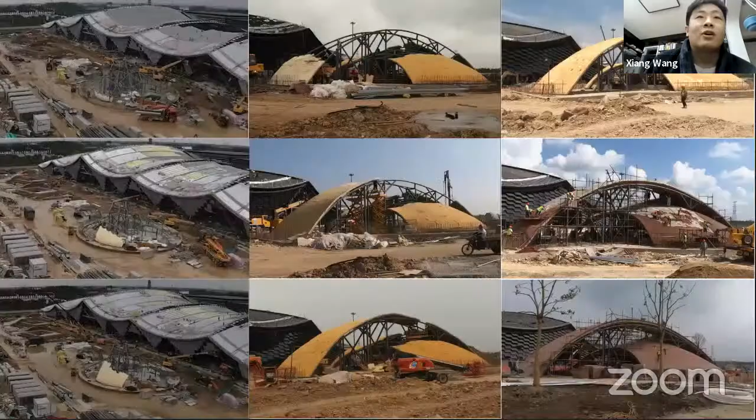This is the construction assembly process. We have different holes on the adjacent walls of different cells or bricks. Then what we need to do on site is just to put it in the right position and use screws to connect the adjacent modules, and then everything will be fine. So this is documentation of how we built this shell. It was finished within two months. Not only very quick, but we have very low waste of materials.

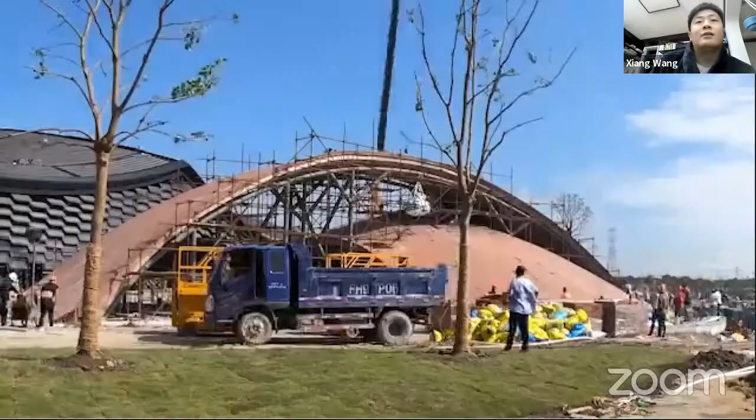And we also considered the dynamic behavior of the structure, simulating different kinds of earthquake modes for the structure. And we also tested that on site, putting 90 tons of sandbags according to the mode the earthquake will act on the structure, to test whether the structure is safe under possible earthquakes. During the tests, we measured the displacement of the structure at different test points, calculated the real displacement, compared that to the finite element results, and verified it.